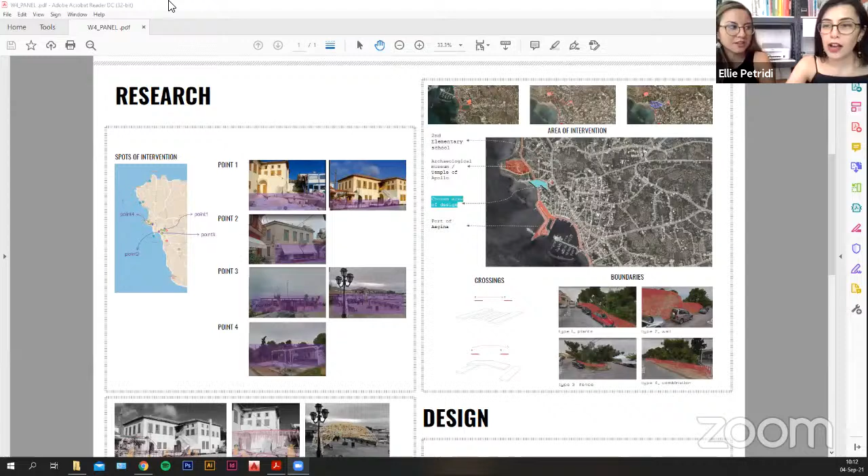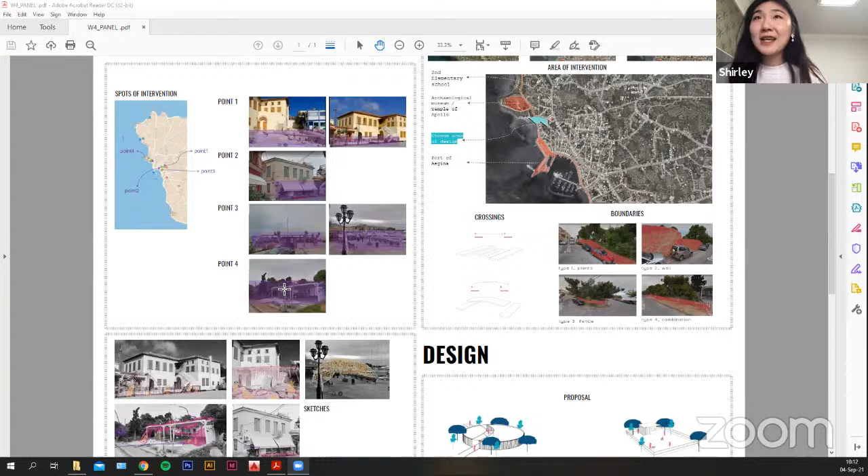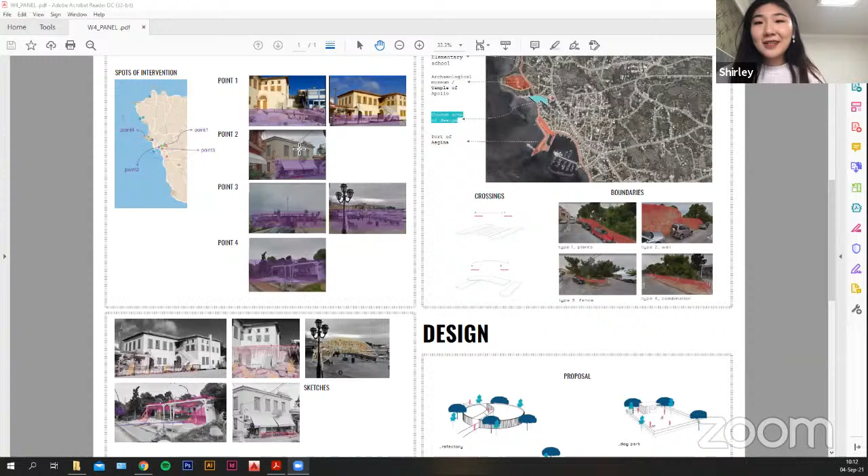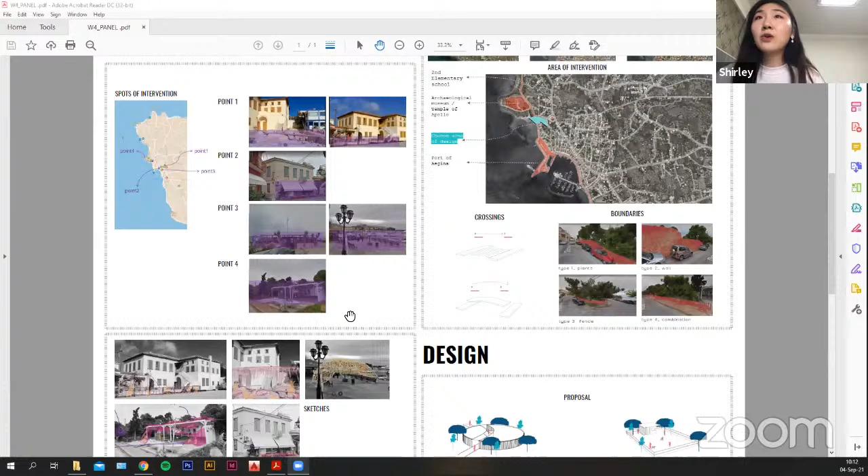We are group A. Our design aim is to reuse waste materials to build a participatory device activation space. The first day we traced the project site through Google Maps, planning to intervene in the city by means of micro interventions, and marked the 4 points of intervention. The next day we made an initial sketch according to the 4 points we marked.

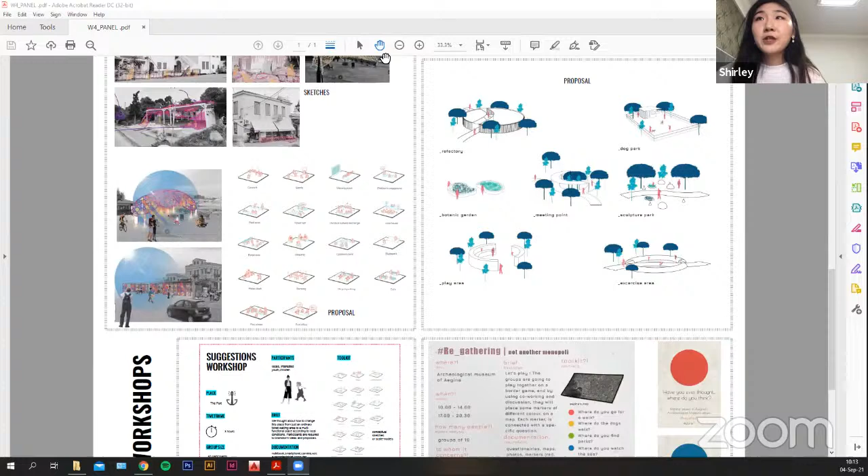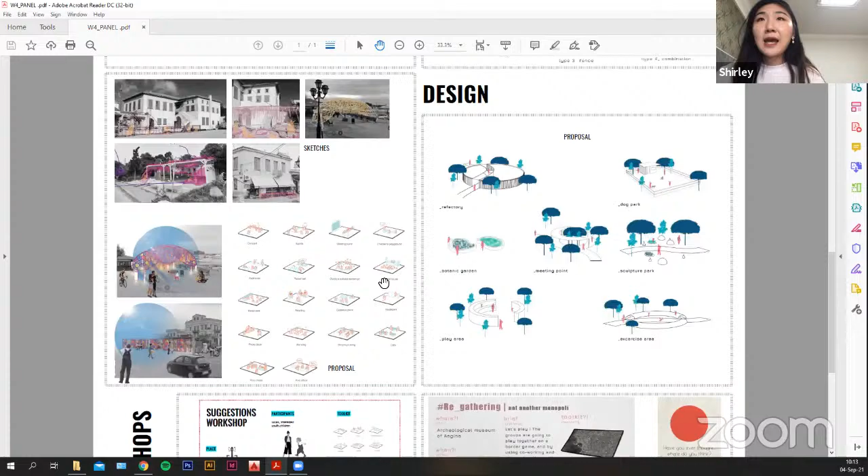On the third day we made an in-depth design of one of the 4 points. First we looked for some reference drawings. We hope to use waste PVC pipes, plastic bottles, plastic straps, color plastic sheets, fishing lines, and fishing nets for our design. Secondly, we brainstormed and sketched out possibilities for the space.

Finally, we extracted the senses of touch, smell, and listening according to human behavior and perception. We extracted the concepts of climbing, walking, hiding, and balance according to human behavior. Combined with our design raw materials, we jointly express the concepts of sustainable design.

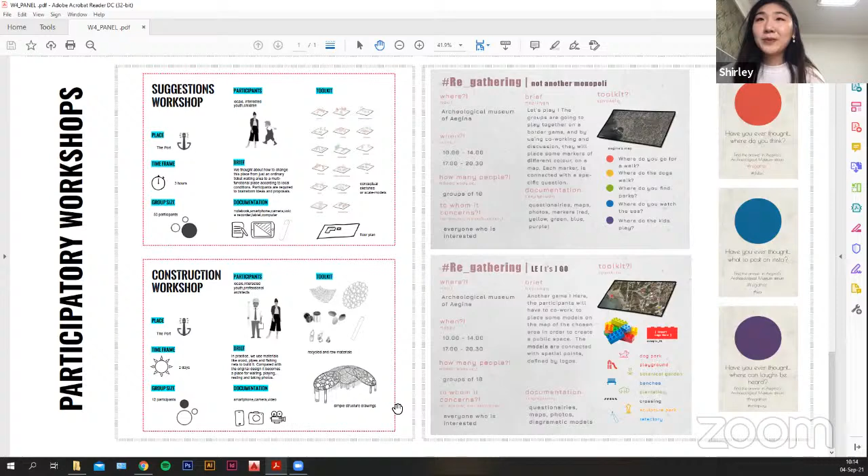On the fourth day we planned the workshop activities, divided the workshop into a suggestion group and a construction group, and made a reasonable plan. Finally we completed our concept renderings. We hope to express an interesting, open, shared, and sustainable playground that everyone can use without defining the function of the place, through reusable materials. Yeah, thank you.

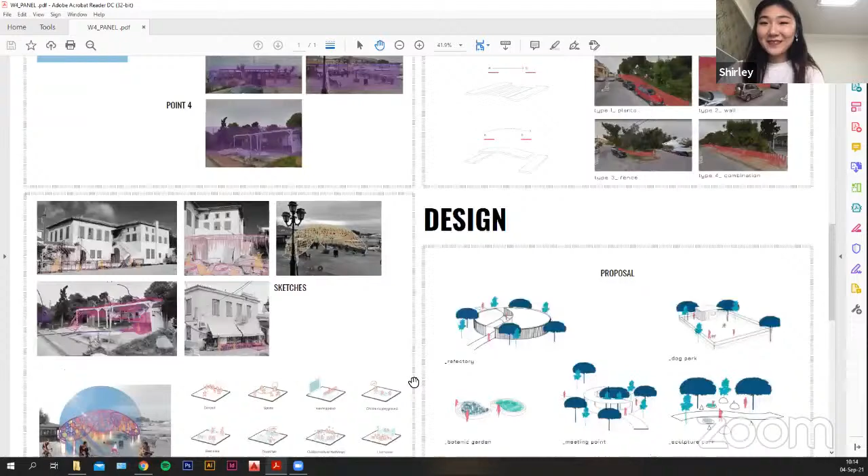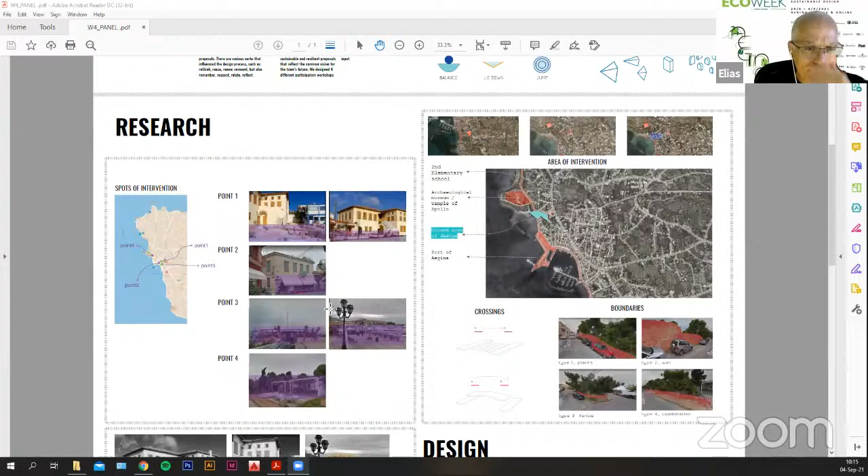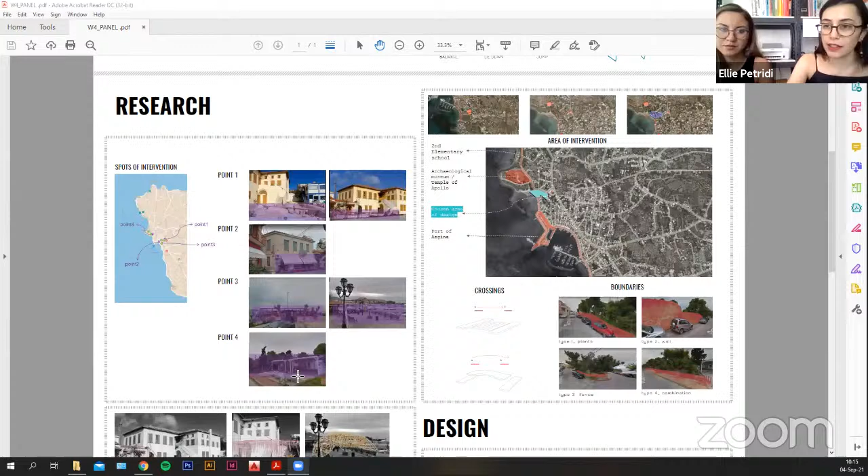By the way, the areas of intervention, the 4 points you're showing - one is at Kivernio, I see. The other is in the front of the island of the city. The other is in the port. And what's the 4th place? It's not clear. It's on Kazantzakis Street, a small unused space. Maybe group B can also present and then we can discuss it all together. Yes, absolutely. I was just trying to orient myself. Okay, thanks.

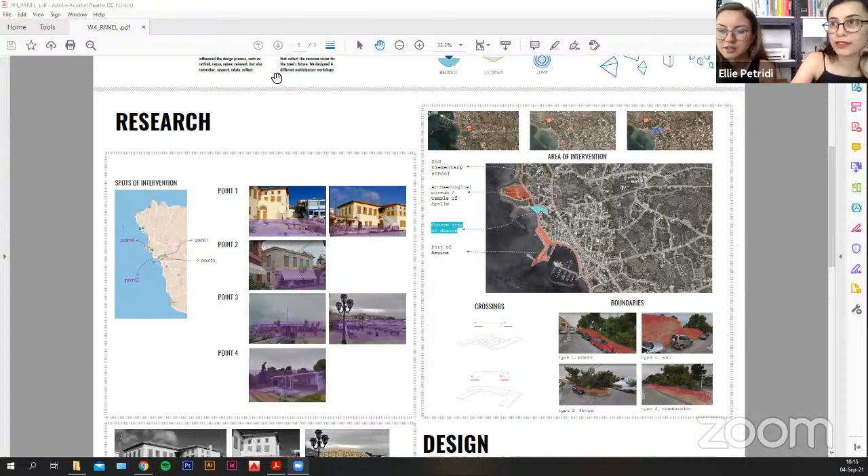Yorgos, can you start? Yeah, of course. You have to excuse me, I have a problem with my connection, so I will not open my camera, but I will say what is to be said. That's fine. Well, me and my partner, who is not here right now,

looked around and chose a special place recommended for intervention close to the Archaeological Museum of Aegina, near the Temple of Apollo and the Archaeological Museum, pretty close to Aegina Port, near the main road of Aegina, and also close to the elementary school. We wanted a place that is also culturally appropriate, easy to access, and that benefits children.

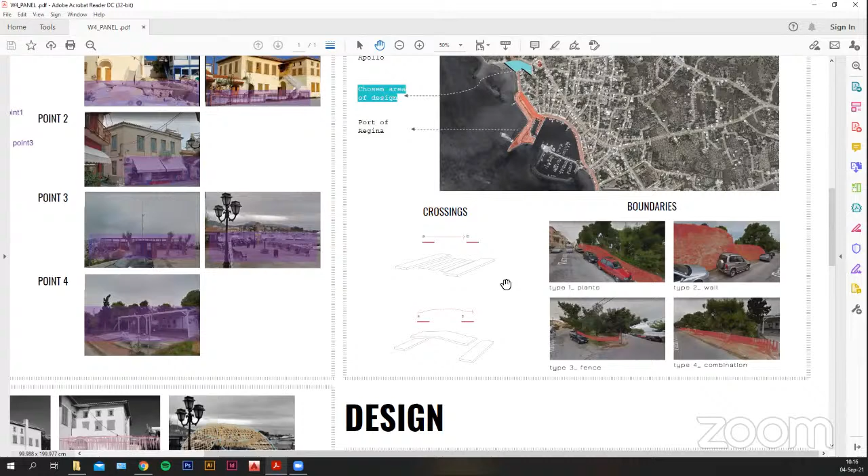We wanted to make crossings across the street, because traffic was one of the main problems, since one of the main things we wanted to do was create a safe environment. We have many different options for that, like a really big crossing or maybe something like a bridge. We wanted to make plants and a fence around the area. Also, the area has some really intense natural boundaries in the formation of the ground, which helped us settle on this place, because we don't need to just put fences around - the whole area helped us see that this is the greatest place to do it.

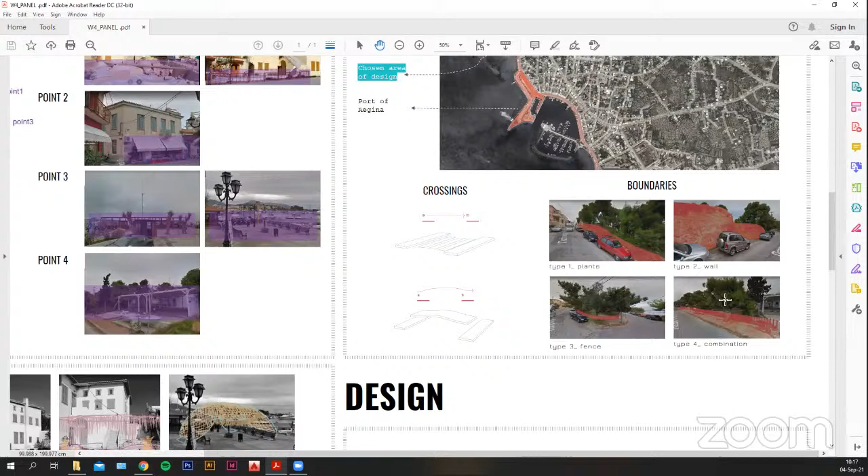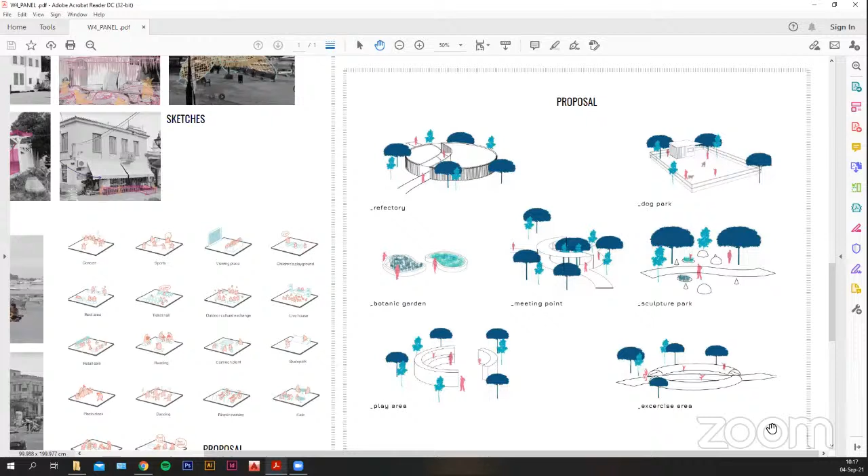We made some proposals about what we should do there. It's a really big area, about 6,440 square meters. Some of the proposals were like a mini refectory, a botanic garden, a play area, a sculpture park where Aegina artists can expose their sculptures, like Barozos, a meeting point with canopies and sun points with many different trees, and also a dog park.

The concept behind the dog park is that Aegina has many dog shelters, and we wanted to make this park so the shelters can bring dogs to the area, take them out to play, and introduce them to people. We want the dogs to go to people and meet them, not make the people go to the dogs.

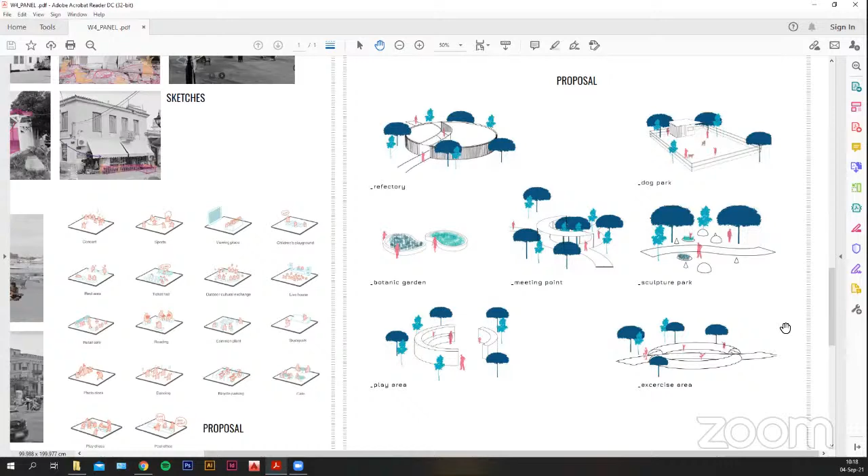And here we begin with the workshop and also a little campaign that we did. The workshop is called Regathering, or Not Another Monopoly, which we will do at the Archaeological Museum of Aegina. It will last a few hours and also a few days, and it will interest groups of 10 random people, regardless of age, gender, or whether they live in Aegina or not. It is for everyone.

The whole concept behind this is a board game. We will put in the first stage a big map after an open conversation of the city of Aegina. Then ask some questions like, where do you go for a walk? Where do your dogs walk? Where do you find parks? Where do you watch the sea? And then make the people show us with pins the points that they refer to.

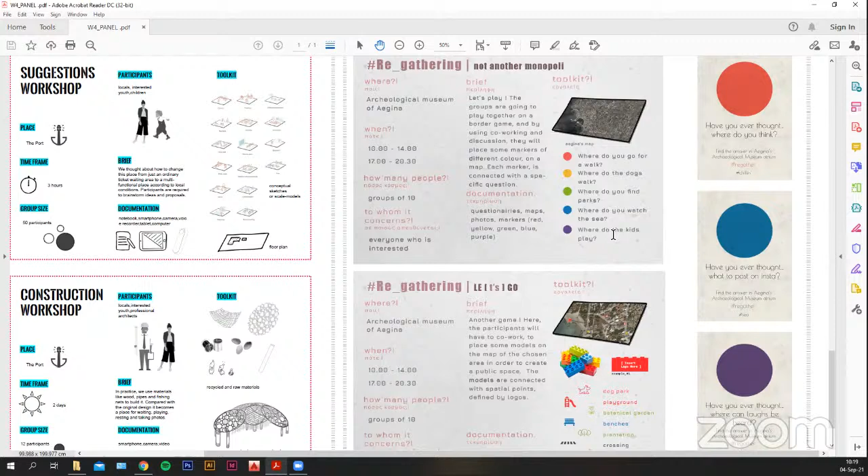After that, we will go to a different type of map, which is the map of the selected area that we wanted. And then with Lego bricks, we wanted to make a proposal about the area, just putting the uses that we saw up top, like the dog park or the canopies or the botanic garden, and make them create an image of the public space themselves.

After taking into consideration, of course, our design and the open conversation that is going to happen, and the image of the public space that the people have created, then we want to make the final design and create a new public space for Aegina.

Also, we have a few posters about this, like a campaign, just to introduce people to that, to make it interesting to them. Like, have you ever thought, what do you think? And also it goes with the hashtag regather, referring to the title of the project, Regathering. Have you ever thought what to post on Instagram, referring to the sea, referring to the landscapes of the place that we've chosen?

We just want to make a safe place for the Aeginian people and also the tourists, also the visitors, to gather, to make exhibitions, to go for a walk, and you can go to the sea publicly, not depending on having their own equipment or depending on any stores. We want to make a public safe place for everyone with many activities to fill the voids that we saw that Aegina got, and also the voids we want to discover by talking to the people.

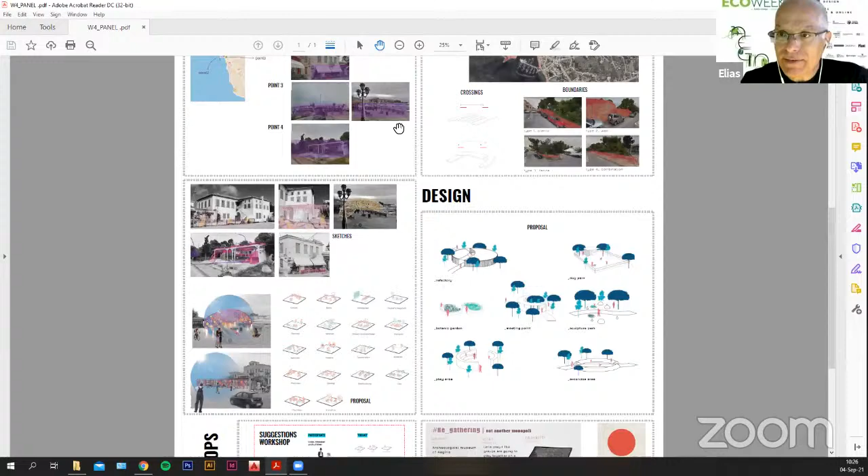I think it's really very good identification and process. The ideas from group one, the systematic way you created the methodology, I think it's very good, and it's very good that it's local and relevant to the local context of Aegina. The second group made a bigger focus on one area, the Archaeological Museum, and also started to touch upon some very important points and connections.

For example, I wrote down about the walk next to the wall. An issue of Aegina is that walkability, although it's an island and supposed to be very walkable, it's extremely dangerous to walk because there are no sidewalks. Cars dominate, and they have the Greek attitude that the road is theirs, and whoever is walking on it should just get out of it. So it's really dangerous, especially for Europeans who come to Aegina and try to walk, thinking it's like in Europe, but it's not.

I think the connection you're making between the dog park and the dog shelter in Aegina is a good idea of starting to connect remote things that happen in Aegina, to connect them to where people are, because very few people go to Faza, the dog shelter. The minute you create a connection, like a satellite event in the city, people start to realize that this place exists, so that's very important. You're creating little pavilions to tell us about things that happen on the island that people don't go to. I think that's brilliant.

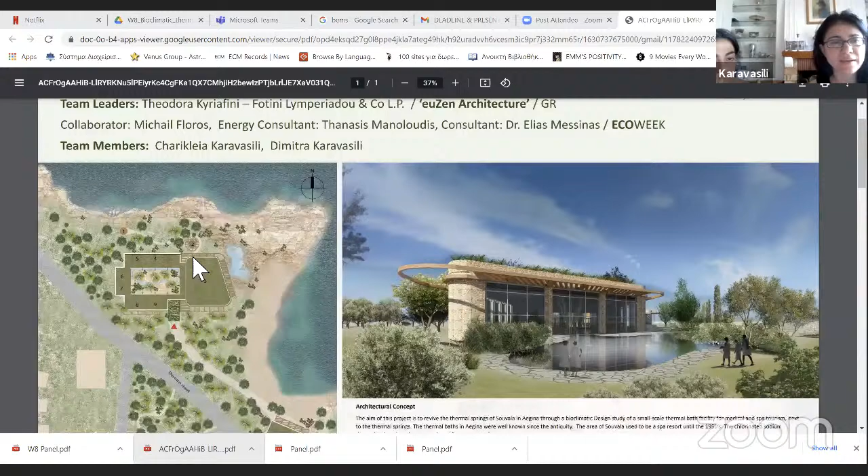This is the old building we incorporate in our design, and it will play the role of the reception area and entrance of the whole complex.

Then, with a path protected by trees, it goes to the main building, to the main complex of buildings, where there is a main area with a big pool with thermal water, and a big atrium which stays at the heart of the whole building, with different functions.

These functions include a hammam or jacuzzi area, private baths and massage. The atrium plays the heart of the building and connects all these functions.

It also plays a very vital role in the bioclimatic design of the building, because it firstly brings nature into the building. The connection with nature is direct.

It plays a bit the role of the old yard of the traditional architecture of the island. There are some arcades that surround the whole building, going around this area.

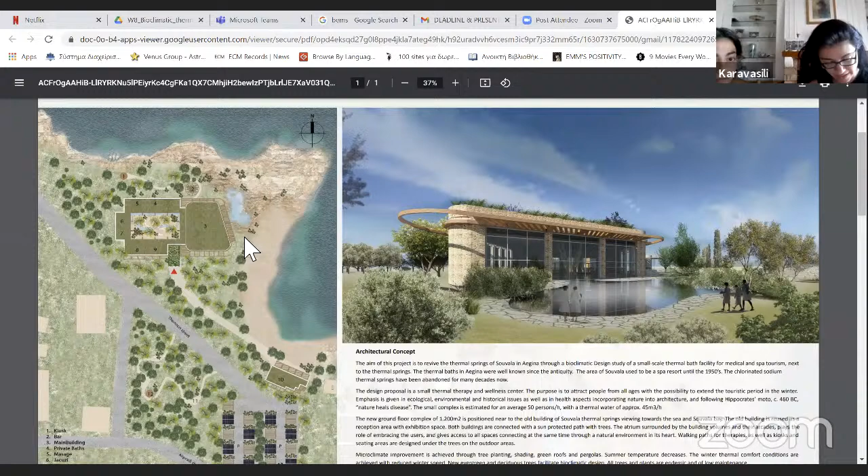We also use green roofs and shading pergolas with vine plants, which are also well known to the island, because they used to make wine there, as we learned in this workshop.

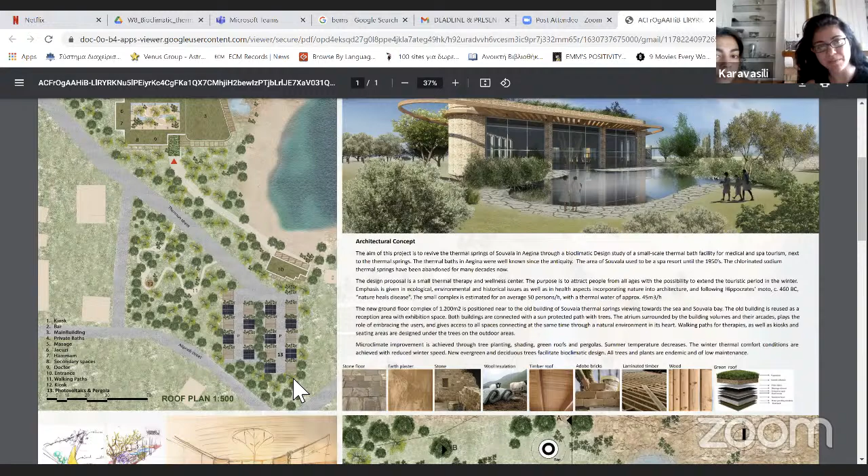Arcades and all these systems help decrease the temperature, especially in the warm summer of Greece, and create a microclimate that targets a design connecting people with nature.

Bioclimatic design is achieved with a building facing 100% south for maximum thermal gains in winter and for easy sun protection in summer.

While the main building here has a smaller northern elevation.

Also, passive thermal gains are achieved through southern windows, as you can see here and here, Trombe walls, and a winter garden on the southern part of the atrium, which is here. This winter garden can be converted into an outdoor space in summer by removing its glazing and storing it into cupboards.

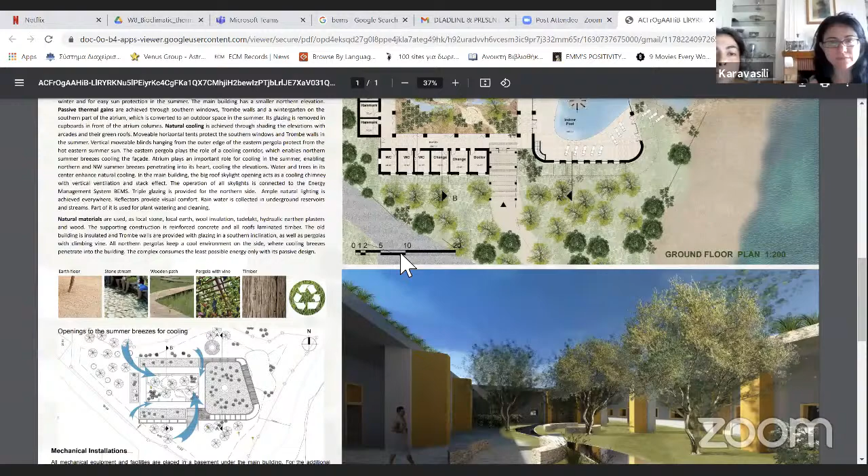Natural cooling is achieved through shading the elevation with arcades and green roofs, as you can see here, with arcades and green roofs.

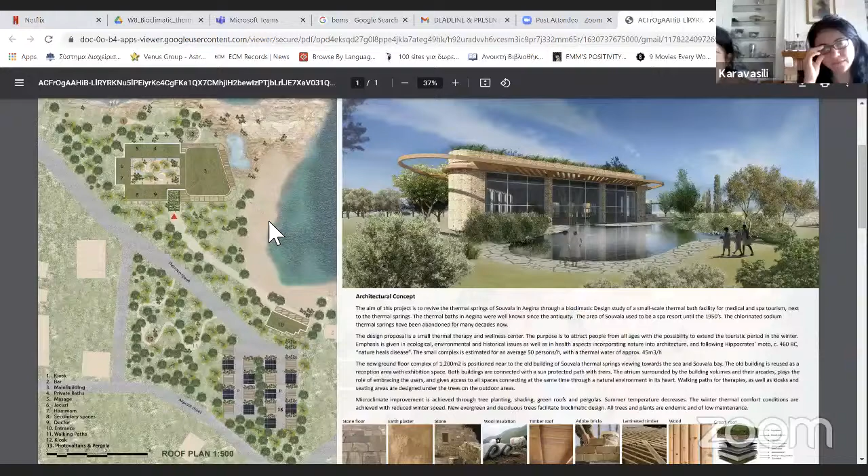In the south, movable horizontal tents protect the windows and Trombe walls in the summer. In the east, movable blinds hanging from the outer edge of the eastern pergola protect the building from the hot eastern summer sun, as you can see right here.

The atrium plays an important role for cooling in summer, enabling northern and northwest summer breezes, as you can see in this diagram, to penetrate into its heart. Water and trees in the center enhance natural cooling. In the main building there is a big skylight opening which acts as a cooling chimney with vertical ventilation and stack effects.

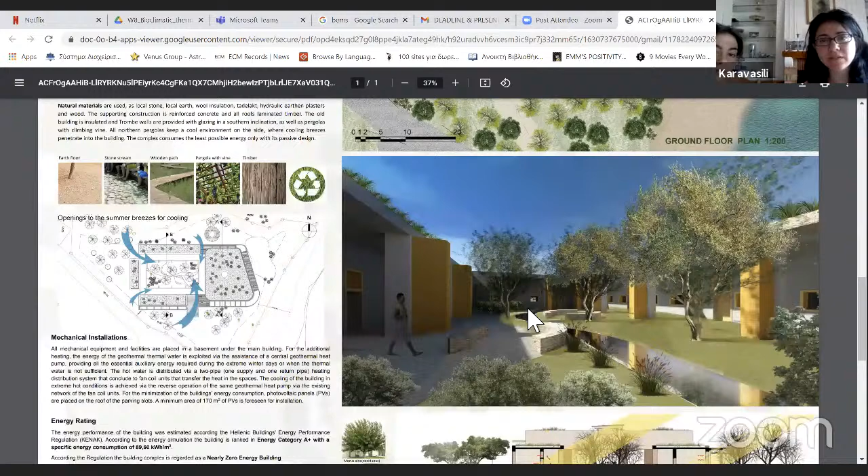We also have triple glazing in the north part of the building, so we are protected from thermal losses in the winter. For example, these windows and these openings have triple glazing.

We have sufficient natural lighting in the whole building because we have used a lot of openings on the walls, but also on the roofs.

We have a rain collection, water collection system, which is also a tradition in the islands, but also very important for Aegina because we learned there is a big problem with water. The plan is for this water to be used partly for watering, cleaning, or other functions of the building.

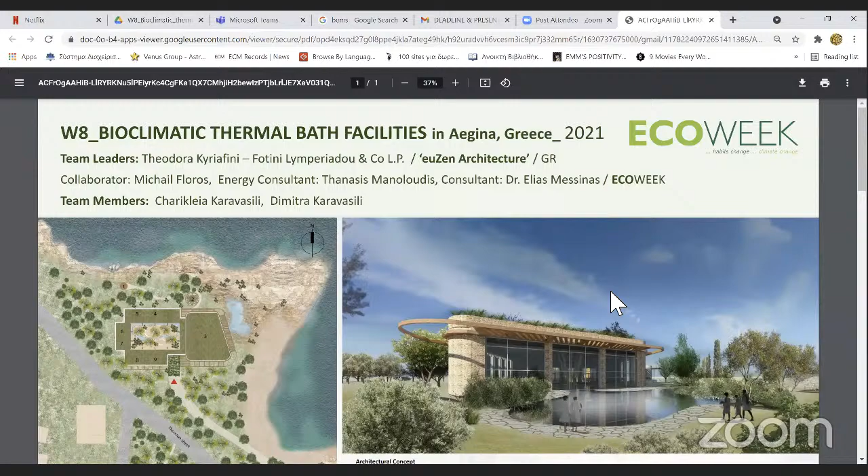The materials we used are natural and local. There is stone, earth plaster, wool insulation. We have timber, laminated timber on the ceilings.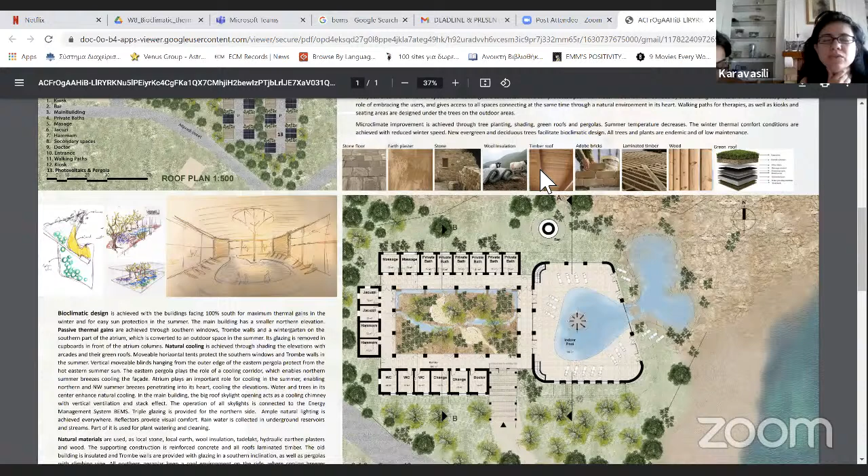For the structure, we have a reinforced concrete structure, but the walls are covered with tadelakt. We discussed with our leaders that there is a lot of volcanic earth on the island, so maybe we can use it, because tadelakt materials are used for spaces that need to be waterproof, where there is a lot of humidity. We discussed using earth plaster or blocks made from earth blocks, but the discussion was that earth blocks don't react very well with humidity, and that's why we use this tadelakt earth with concrete.

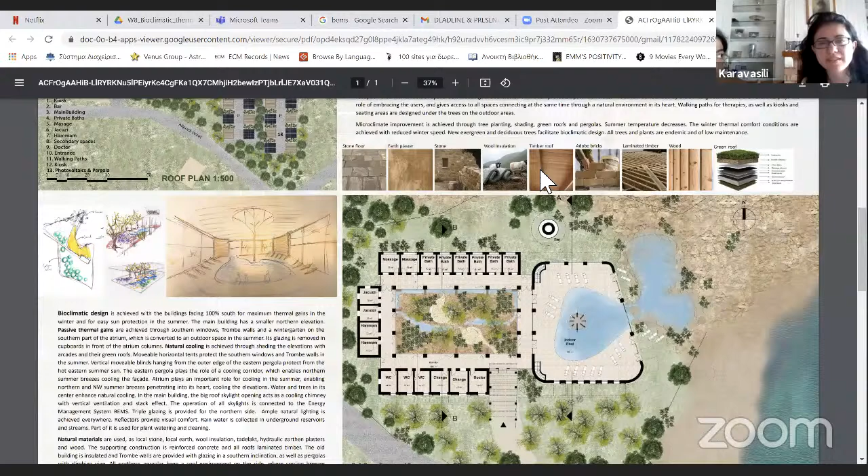We use stone on the floors and on the walls, as I said before, laminated timber on the ceilings, and a lot of wood.

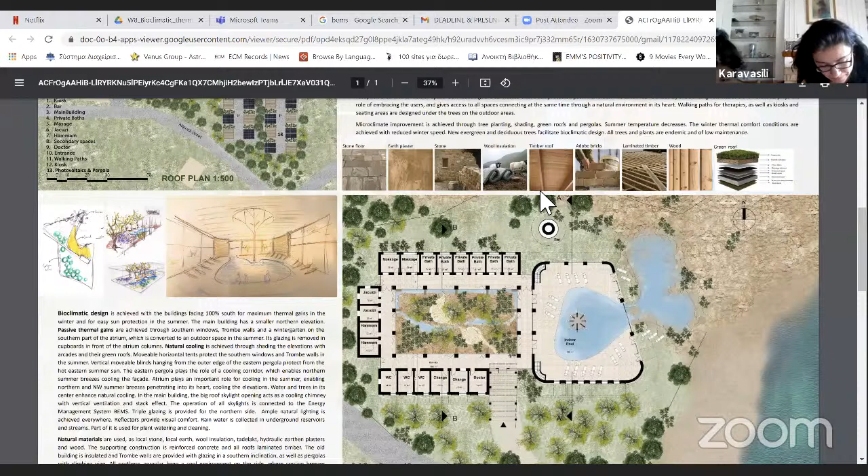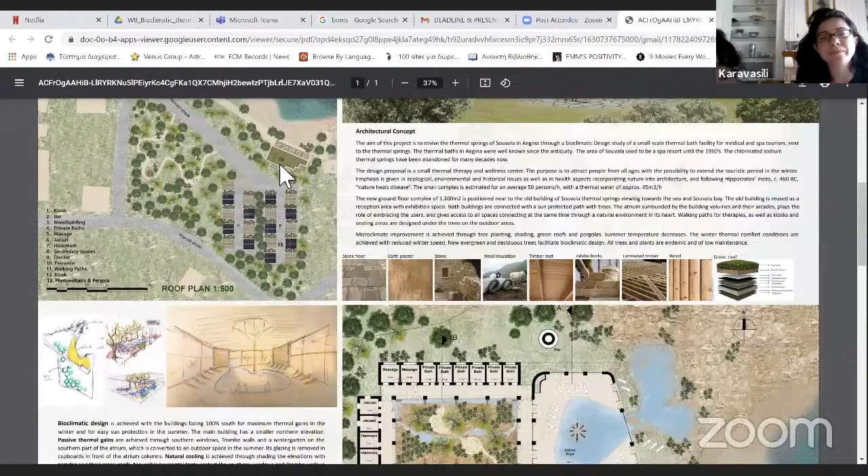We also have some improvements to the old building, which is also insulated. We use some insulation there, and we put some shades and pergolas on the south part with vines. We also use that in the parking places where we have some solar panels, which I'll speak about a little later. We also incorporate some Trombe walls, and in this way we improve the energy consumption of the building. We also have a green roof there.

Only with a passive system, the whole building has really good energy performance; the consumption of energy of the building is really, really low.

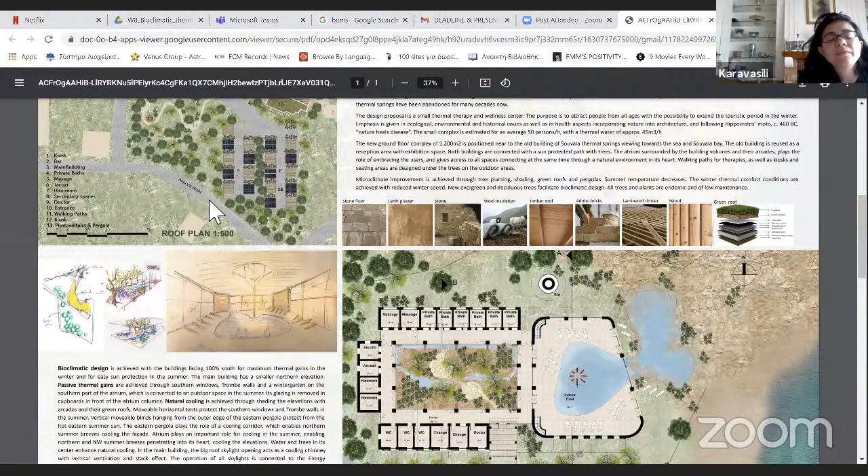But after a long discussion with the mechanical engineer, we were convinced that we need some mechanical, active systems, which use as a basic energy source the thermal energy we have because of the thermal water in this area. So we use the thermal water to make the building warm, as heating energy.

And when there is not enough, we can make the water warm again using electricity, which is produced from the solar panels we have incorporated in our design, placed on our parking space area.

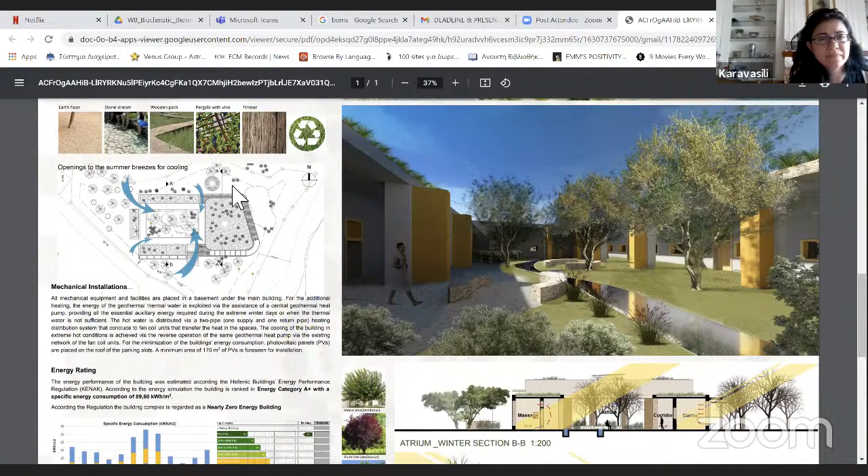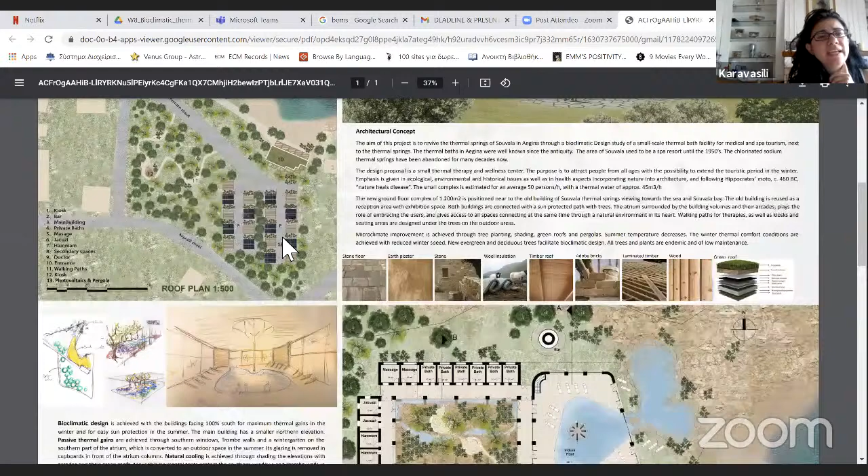It is about 170 square meters of solar panels here, about half of our parking place. This electrical energy can be used to also support all the systems that provide mechanical heating and cooling.

Another system we use, our main heating system, is heat pumps which use this geothermal energy, supported by a two-pipe system, supply and return, ending in fan coils. This is because geothermal energy for cooling doesn't always give the results we want, but this is only for spaces where there are offices or secondary functions. For example, in hammams or other places, we don't need anything from heating or cooling systems.

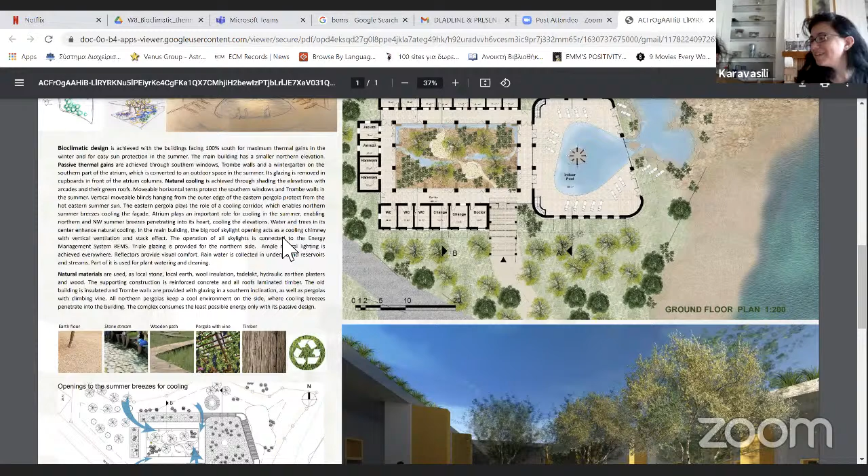But apart from this, all these systems use alternative energy sources, geothermal energy, also some solar panels, and that's why our building is, according to the mechanical engineer we collaborated with, well designed.

The building is ranked in energy category A+, and is regarded as a nearly zero energy building. That's all, thank you very much.

It was a really, we learned a lot in our workshop. We want to thank our leaders. We learned a lot of things, but didn't have time to show all of them, and all the systems we used, like Trombe walls, and passive systems like shades and how to give the slope needed to protect our buildings from sun or wind. And this is our result.

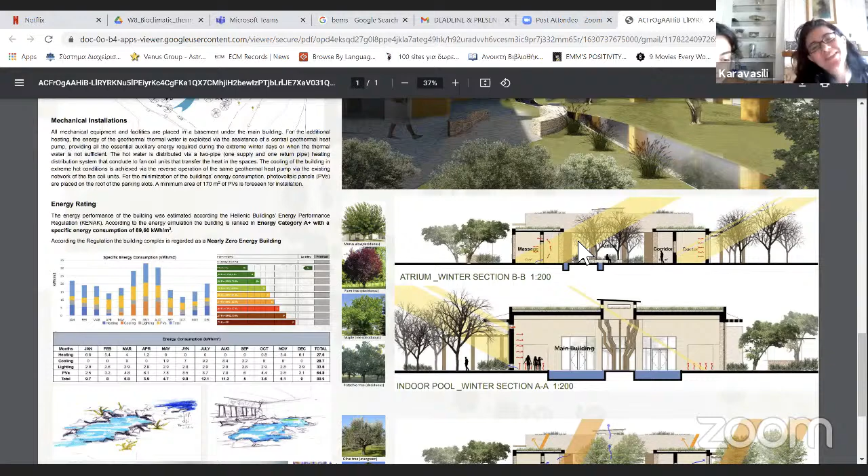Congratulations. First of all, for the amazing work that's been done. You were just two, and I can't believe you've done all this work in just 3.5, 4 days. So first of all, congratulations for that.

And Esmina, we can't hear you well. Please keep your microphone close. Sorry.

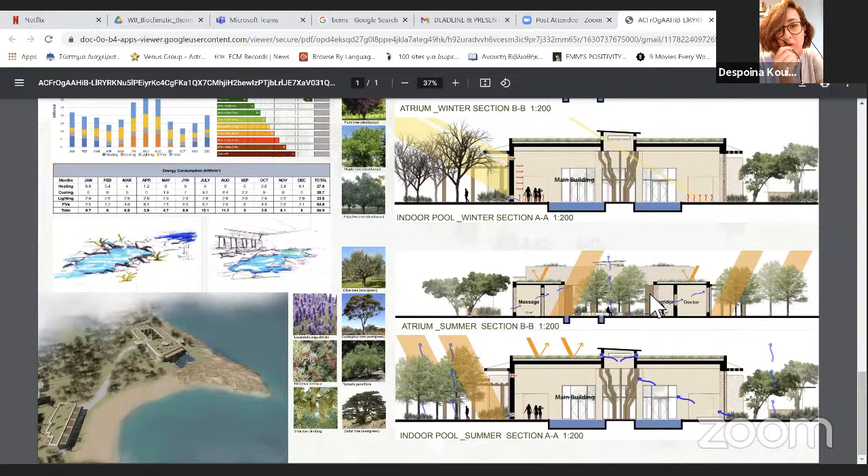Congratulations, because first of all, the group was really small, and the amount and quality of work is impressive, it's stunning. I saw the panel and was like, oh wow, crazy. And we have a lot of support, we had a lot of support and help from our leaders, to be honest. That was amazing, because it was co-working, and it was really important to see also this part, for us it was very important.

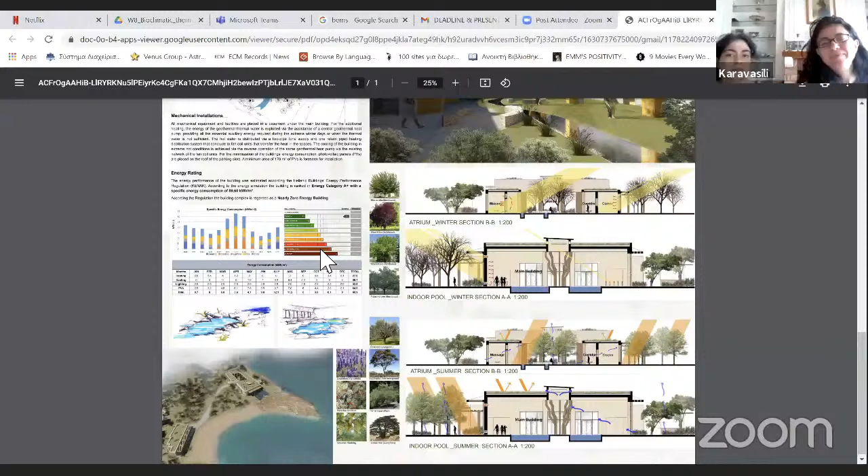I think sometimes if the workshops are a bit smaller, they can be more inclusive, and it can actually help to understand and learn things in depth that otherwise, in a much larger workshop, would be really difficult to focus on. It's impressive, the amount of work, and you try to incorporate a bit of everything.

I'm not an expert in bioclimatic architecture, but I totally trust Theodora and Fotini, because I know they're definitely experts on that. But it's interesting because during the last days in Aegina, I actually stayed in Souvala, very close to the spa and the thermal bath. When I asked locals how to get there, they said, no, don't go there, there's nothing there. So I think that could be something that can bring life into the space, and create this kind of alternative, health environment that we're all looking for when we visit a place.

Elias, I want to add something maybe.

I'll share my amazement with the amount of work, the quality, and the depth of the work. It really looks like a fully preliminary design scheme that's been worked out at a high quality, covering all the bioclimatic aspects and alternative energy, heating, cooling aspects. It's really impressive. So congratulations, we will definitely try to promote your images.

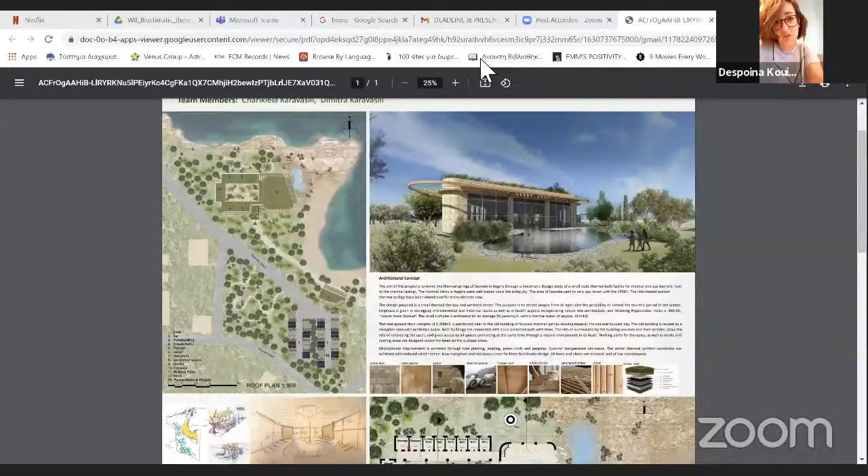Thank you very much, Fotini and Laura. We know it was a very challenging week, and we're very impressed with all the workshops. So congratulations to everyone, thank you very much all of you, and congratulations to everybody.

I think we'll do the closing now. The work was amazing, the ideas were great. It was totally what we wished to expect, and even more. We will definitely try to promote the work through Aegina, through the local businesses, through the local people who may have some influence to move things a little forward.

It was a very challenging week. The online format had its problems. Maybe it has its benefits too, but it was definitely a challenge.

We will summarize all the presentations and the whole week, and send you something in a press release format. Try also to promote it through your channels as much as you can, so the word gets out about what we did and the value of it, and the ideas and values brought into the project. We should keep reminding architects and designers, those who set the rules, that there are other rules as well that are sometimes forgotten, and we should keep reminding them of those rules.